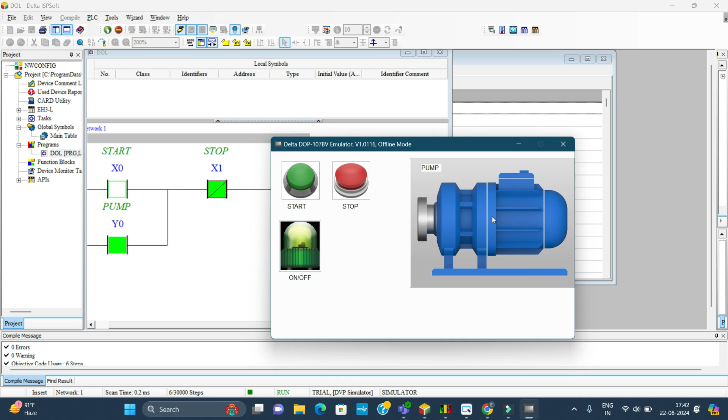The system is showing me the pump is running and the indicator shows it's on, as well as when you try to visualize here when I press the start. This one is not energized, but it's showing me how the pump and the indicator is on, and then the latching system is as well.

Welcome guys to yet another video where I will be taking you through building a direct online starter. There are conventional ways of building these, and last time we discussed and simulated it. So by now, if you watched that video, you know how to build a control panel of a direct online starter. But of course, I'm not saying buy a PLC and go build a direct online starter with it. It's just that we are using it for building our knowledge.

Right now, here in front of you, there is a program which we could use to run actually a direct online starter with the same power components. We just discard the control circuit and then we use only this. As you can see, it just looks easy, but every time I bring a program, it has some new basic thing that we have to encounter and use.

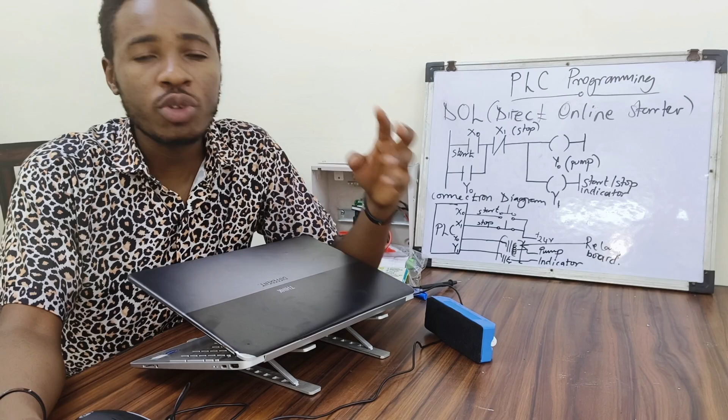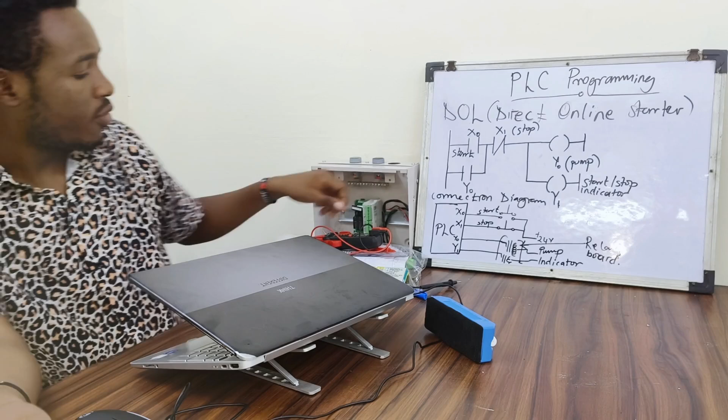So in this kind of program, a direct online starter, if you go on this control panel, you only have two switches: the start and the stop. Those are the only two things you have. So if you have those two things, how are you going to do it? You just know I have two inputs and two outputs.

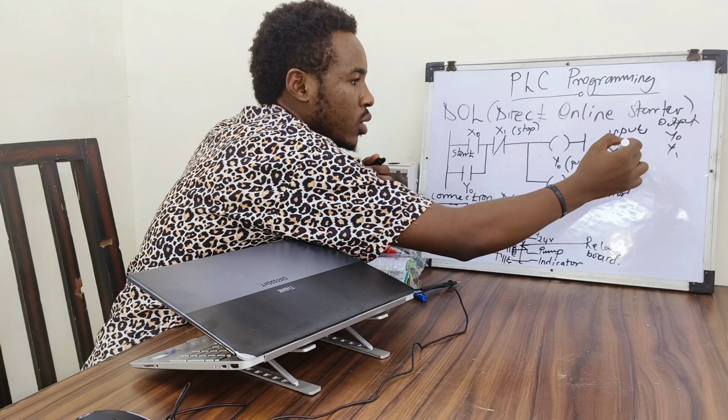We have inputs x1, x2, and outputs y0, y1. You can say x0, x1 as well. So x0 we can say is the start, x1 we can say is the stop, and y0 we can say is the element we're trying to run. It can be a bulb, a motor, or any electrical equipment. And y1 is the indicator which is going to be lighting on or off. Yeah, so that's the only program we have.

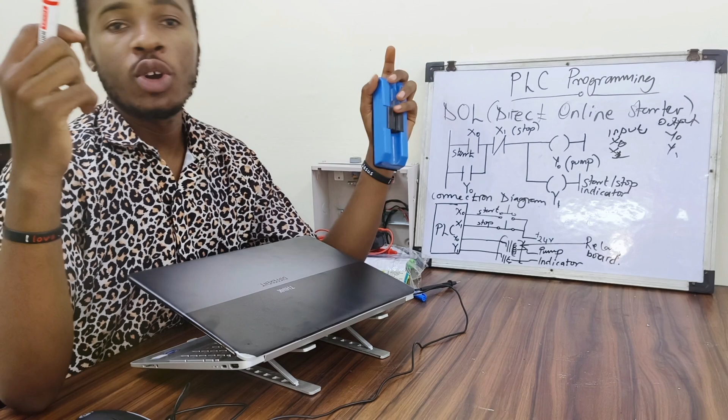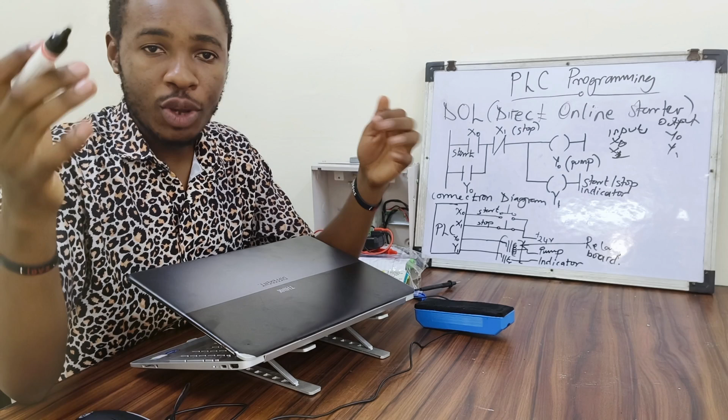So if I have it connected like this, I have the start and stop connected in series, but I connect the normally open of the start in series with the normally closed of the stop, because stop is going to only be connected in a normally closed way. Any program you're going to be seeing, the stop and emergency buttons are always connected as normally closed. The reason - one day if you get it and you're watching this video, give it to me down here.

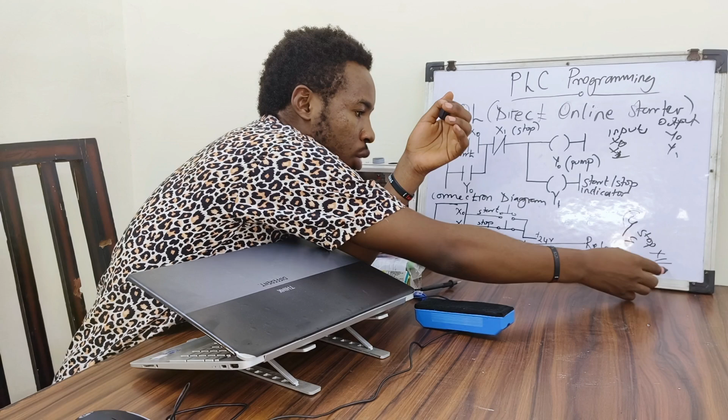And then afterwards, when you have the system, I have connected in parallel with this a y0. Remember, these ones are not maintained buttons. These are push buttons, momentary switches. And in one of my videos, I explained very well about momentary and maintained switches.

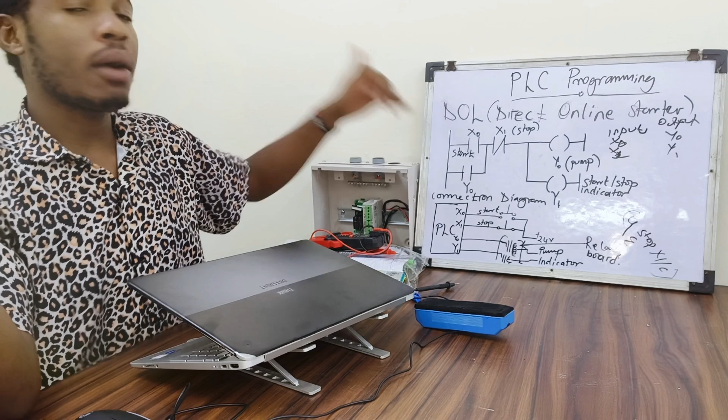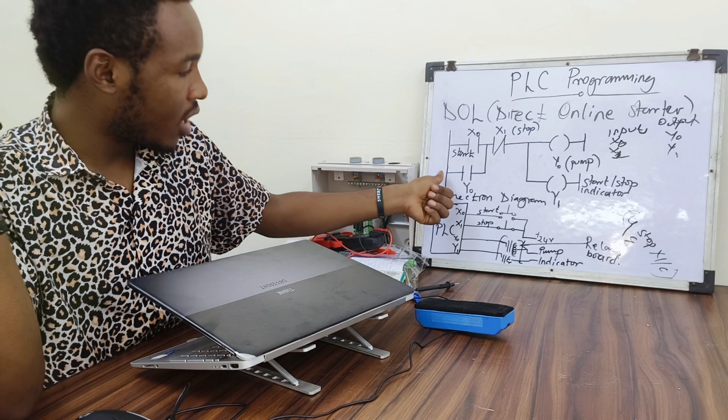So once you close this button, once you close it and remove your finger, it's going to come back. And when it comes back, you can see there is no flow of power up to this other end. So when it comes back, when you remove your thumb, you must provide a way so current keeps flowing from the positive rail to the negative rail. So this is the way I have provided.

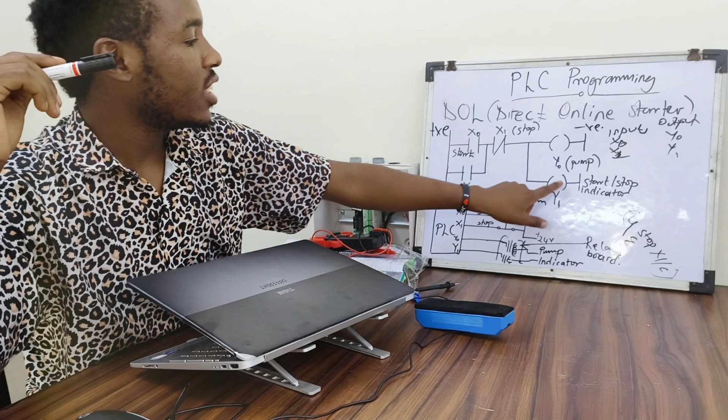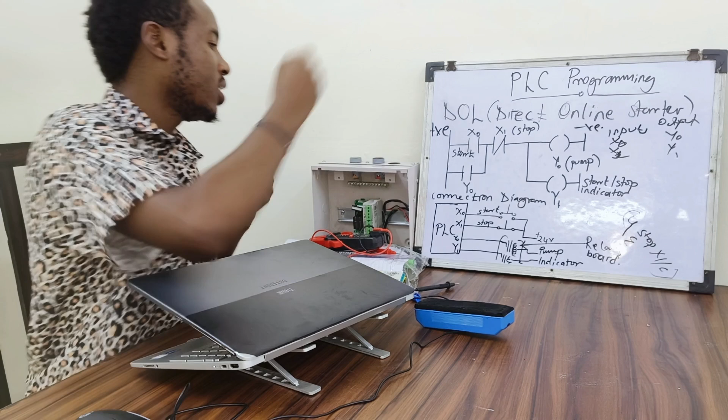And remember, if I close here and this gets excited, then if it gets excited, you can see this is y0, and I choose a normal open contact of y0, this one will be closed. And once this one is closed, that means power will keep flowing through here, this direction, to supply as well as the indicator. And what does this say? This talks about latching.

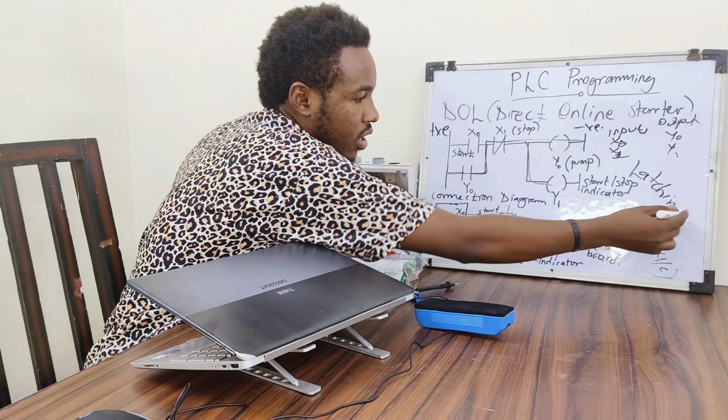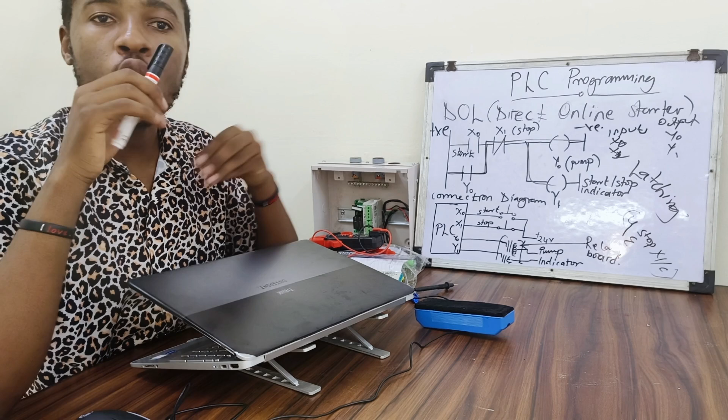So latching has been the major concept, as in why I brought this kind of system. So you have to latch, and latching is something which is directly or equivalent to a hold-on switch. I'm going to make a video about it and explain it more. It is equivalent to a hold-on switch in conventional control circuits.

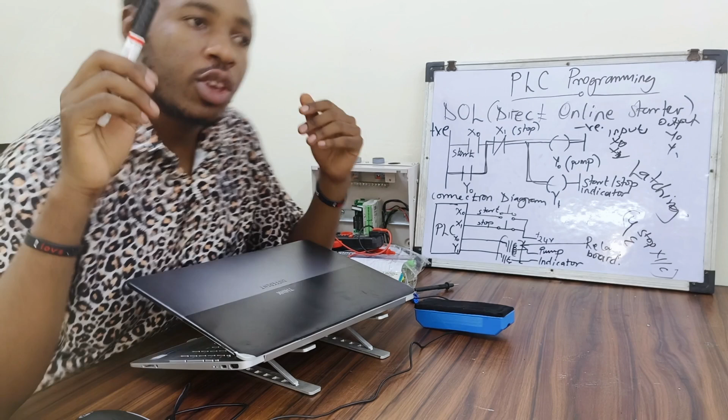Thank you. Let me take you through the simulation, and we design the program, we do everything. Welcome to the programming session and the simulation session.

As we discussed, I have to first go to the comment list and I show you the inputs. You can see I only have two inputs, start and stop. Then I have only two outputs, that's the pump, the powering of the pump, and then the on and off indicator. So once I'm done with declaring these variables, I go to my program.

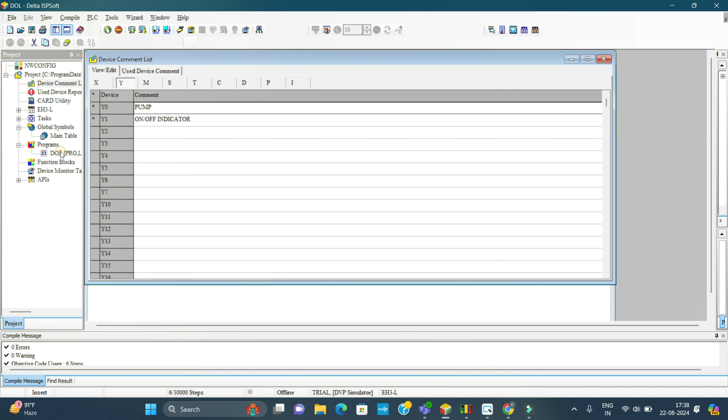The program is as I showed you on the board. I have the start and the stop connected in series, but the stop is normally closed. And then the outlet goes to the pump and the indicator. Then here I provide the latching. So this program, I compile it. If I compile it, it shows me it is fine because it indicates no errors and no warnings.

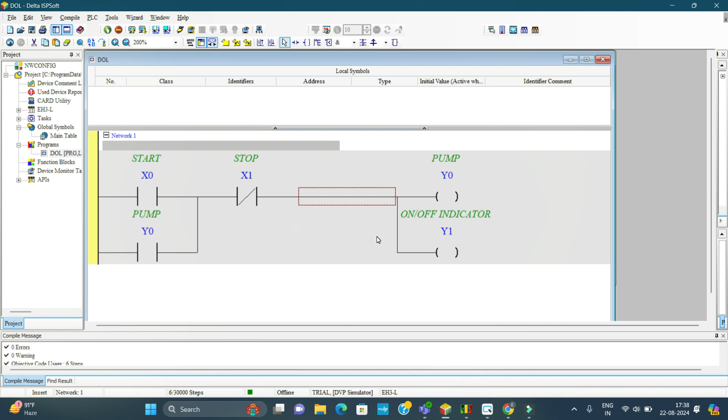Then I transfer it to the PLC. This is when I'm inputting it to the PLC. Now it is in the PLC, then I can run the PLC. Once I run the PLC, I go online. So here it is online. So basically it's done. If I press start, it should show the pump is going to run.

If I set it on and I go online, then for the communication, I have to set this. I normally forget it. So it's enabled. And here, if you want to run the PLC, you can simulate it from here. You see what will actually happen.

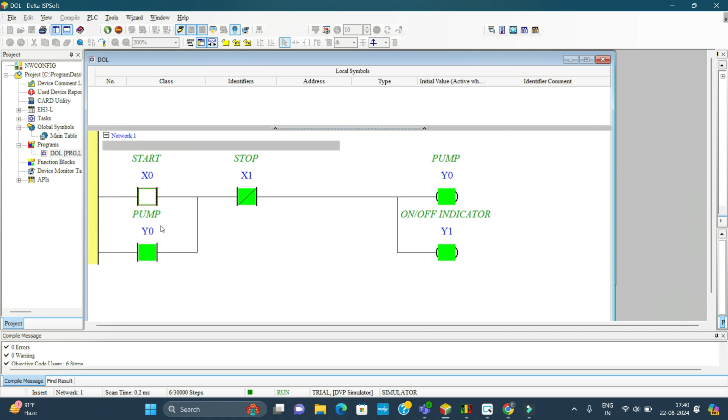So if I set this on, you can see the pump indicator is on, and then the pump itself is on, and here you cannot visualize the push button because here I have just set it on. I have to set it off again for the action of the push button to show it is on and off. But then if I want to stop the system, I now have to go here and set this one on, so the system will go off, then when I bring it back off, it cannot come back.

So to visualize everything, I normally like incorporating this to the HMI. I've already set it up, given the addresses of the start and stop. Then this is the pump, then this is the indicator. I have already compiled, then I just go for offline simulation. So if I go to offline simulation, this is my screen. This is a screen that will be in the remote area where you're going to put the screen for visualization.

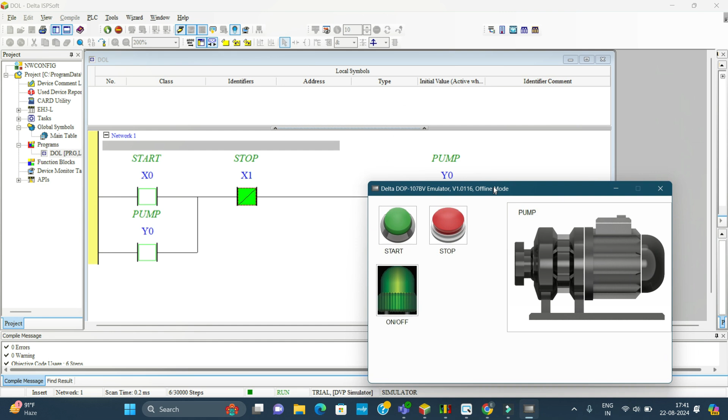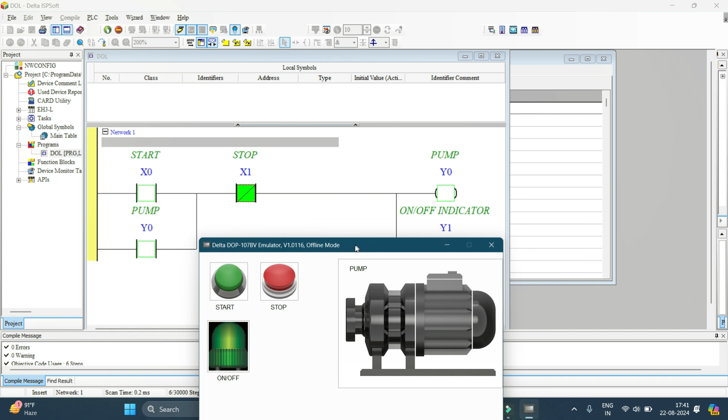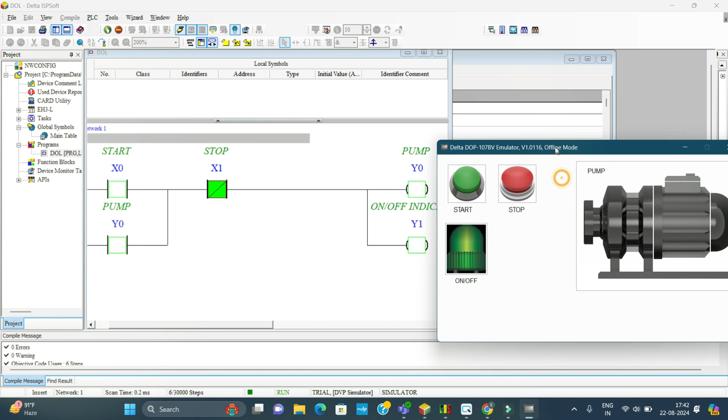So I have to make this one a little bit smaller, maybe up to here. Then I bring my screen over here. No, this one, this one. So this is my screen for now. I need it to be in a position whereby we can see everything together. Yep, a little bit here, then I can bring my screen. Yep, here. And bring this one, yeah. So yeah, let's have it like this.

These are the momentary buttons. I have the start and I have the stop, and then I have the indicator. So once I press this start, I'm supposed to see this pump going on, and once I press the stop, I'm supposed to see it off and this one as well off. So if I do this, the system shows me the pump is running and the indicator shows me it is on.

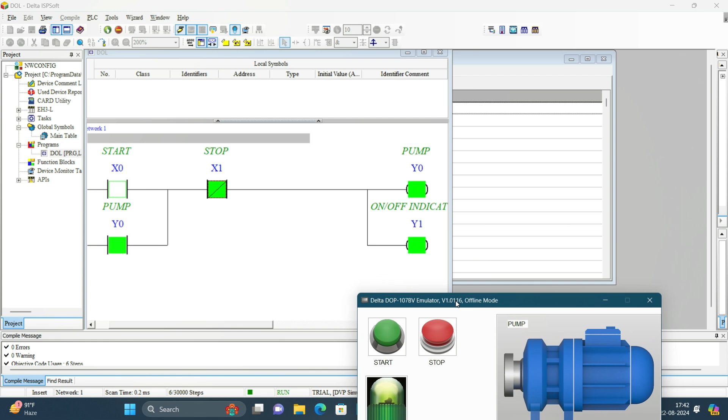As well, when you try to visualize here, when I press the start, this one is not energized, but it's showing the pump and the indicator are on, and then the latching system is on as well. Then when I come here and press the stop, it shuts down the system, you can see. So this screen of mine, I pair it with a start and stop. The pump is on, the latching system is working well, and we have the communication.

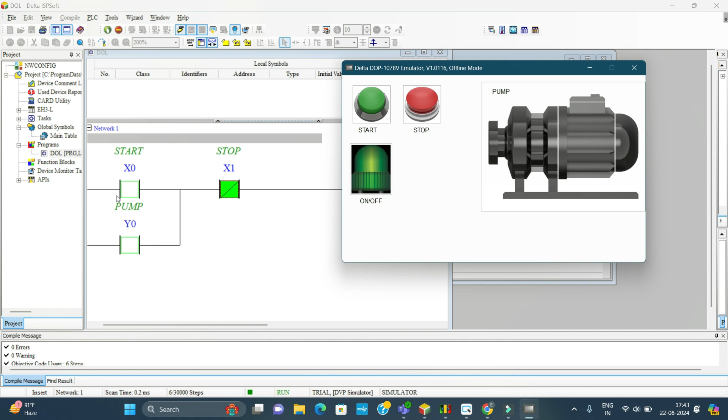Once I press stop, just watch this button here and this one. Once I press stop, this one gets that momentary move. Once I press start, just watch this together. It will just show on and off, but the latching will continue. You see? That's how the system is going to work with the PLC. At least you know latching, you know how the system can operate.

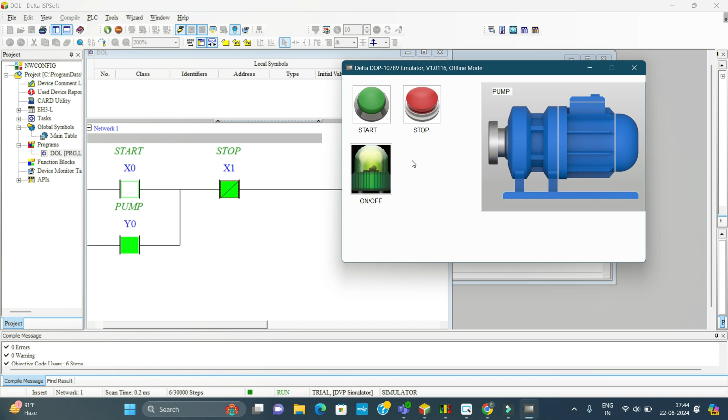And once you want to learn all these things, these SCADA systems you see out there on the software, you have to design. I come up with each and every element. I come up with the right images for the pump, the right images for the starter, so I'm the one that makes the selection. So the human machine interface, it's you, the designer, that has to come up with it. But first forget about it and we concentrate on this one because this is the basic. You can become a PLC designer when you only know how to program this and you leave the HMI.